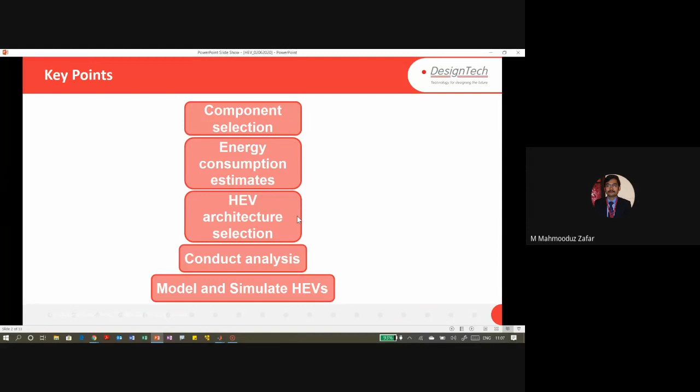So with that, I'm going to start with what are the challenges with HEV design. There are various challenges available in HEV design. I have taken some of these challenges and jotted them down on this slide, so we can see how MATLAB and Simulink can help us overcome these challenges. First is architecture or topology selection. This is the biggest challenge, how we are going to select a particular architecture which we have to design for HEVs. So this is the first challenge.

Second, again, is the selection and sizing of components. Various vehicles require various components, as well as different sizing and specifications. Then there's complexity in modeling plants and controllers. Definitely, when we are going to design our vehicle from scratch, we need to build up different plants for that particular vehicle as well as controllers. How are we going to address such kind of complexities?

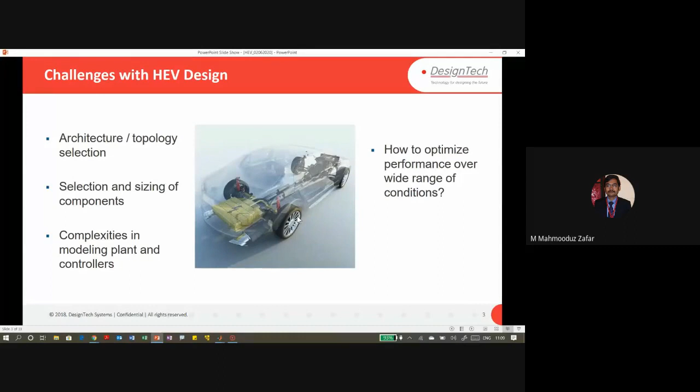How we can optimize performance over different conditions, like various road conditions and environmental conditions, so how we can overcome the performance challenges of these HEVs. And whenever we are building control algorithms for HEVs, whether those algorithms are real-time implementable or not, whether we use them in real-time scenarios or not - these are all challenges. We are going to address some of these challenges in terms of design and simulations, which is what we'll discuss in today's presentation.

For optimization and control real-time algorithms, separate sessions are there, so I will share some links so you can go ahead with those sessions. As I said, in today's session we are going to discuss these kinds of things.

I have taken an example with these challenges which we have right away. First, for HEVs we have parallel or series-parallel architectures. For example, we see a front engine system, then a clutch system, transmission system, different wheel positions, and different components available.

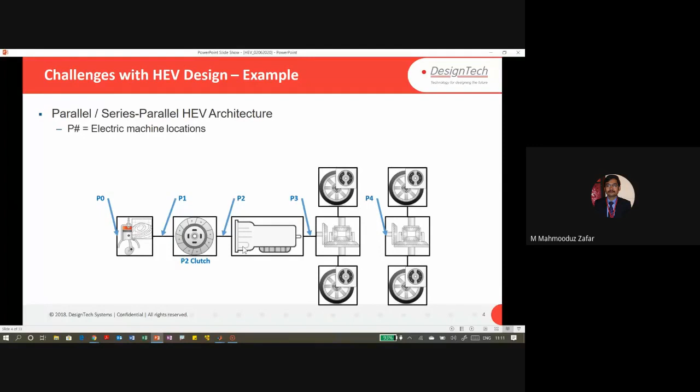We have different locations available for these electric machines. When we say P followed by a number, that means a different location - so first one is P0, then P1. There are various options or sections available which we want to simulate on top of MATLAB and Simulink or any other software. These combinations can be chosen depending on our need - which particular simulation requires a simple P2 combination, or P1-P4, or P1-P3 combinations.

Every combination, or each location, has different pros and cons. How we address these - for example here we have a P2 combination available, with clutch, machines, which is nothing but some gears, as well as transmission and clutching system combined, or generators or motors that we can use along with the whole system. There are various different combinations available which we can use with reference applications provided in MATLAB and Simulink tools.

Another thing is selection and sizing of components. As I said, whenever we need to choose motors, generators, or other machines, we have to select from specific libraries. Or sometimes we need to work on data-driven modeling, where we have to link our components with specific data sets that have certain limitations - it cannot go beyond a particular point. So that kind of linkage is available.

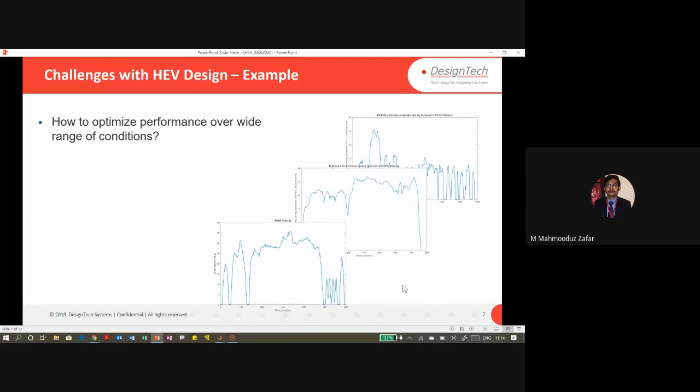We need to reduce energy consumption so that we can intake lesser fuels or lesser energy, so that it can provide maximum performance. Also, drivability requirements are there, such as acceleration time and gradability, and many more options which we can address while designing HEVs. Depending on our need, we can address out specific challenges with this.

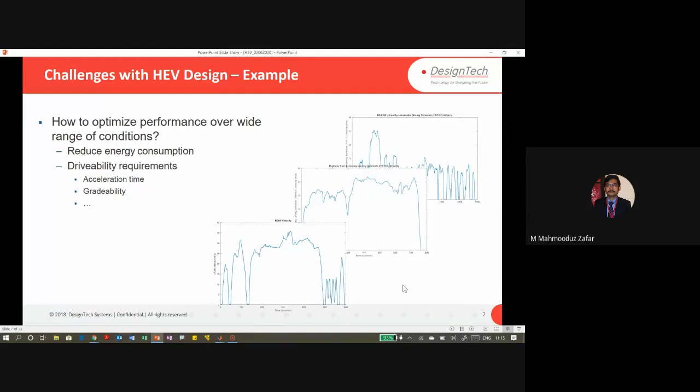So we have options available, we can start defining from a requirement into a modeling environment. Whatever our project need is, whatever our modeling need is, we can directly define in our environment, which is known as Simulink. Then after that, we start designing our system.

That's why we say system level design, where we can evaluate and complete architecture, assess performance, and use it to develop closed loop kind of systems also.

Subsystem design: we can distribute, like in a vehicle or a particular system, there are various sections available. Transmission is a separate section, acceleration is a separate section, electric system is a separate section. We can distribute things like battery management or engine into different subsystems and design a complete system within the Simulink environment.

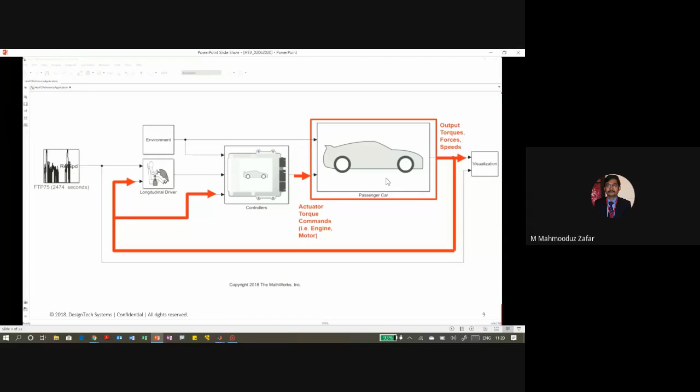Now what we are going to do is run a simulation of such a system and see what kind of outputs we are getting.

So in this model, what we are doing is just executing the model so that it can run. As I said, this model has various components, so it needs to be simulated, and we can get results in this visualization section.

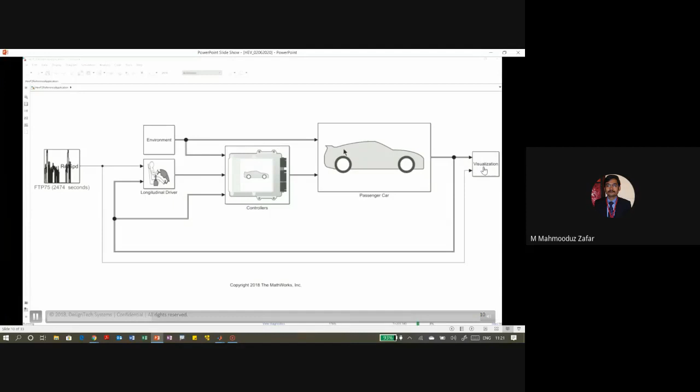In this visualization section, we have different scopes available where we can see performance curves. While simulation, we are able to see various curves where we can identify engine speed, motor speed, velocity, and we can trace targeted and actual velocity. We can see what the battery current would be, battery SOC, or fuel economy. So a complete analysis we can visualize in this place.

If somebody wants a three-dimensional kind of visualization where we see how a vehicle is actually moving, when some obstacle is there, how it behaves, those kinds of options are also available, so we can link up our Simulink models with various other tools which can perform virtual scenarios of the external environment. So we can link up with Simulink 3D Animation, a product which allows us to define a complete virtual environment in a VRML kind of format, and we are able to see how these things are moving.

If somebody wants to make an autonomous kind of system, we have tools available like the Automated Driving System Toolbox, which allows us to perform complete autonomous simulation, and we see that again in virtual scenarios. Options are also available which allow us to link with third-party tools so that we can visualize in those kinds of environments also.

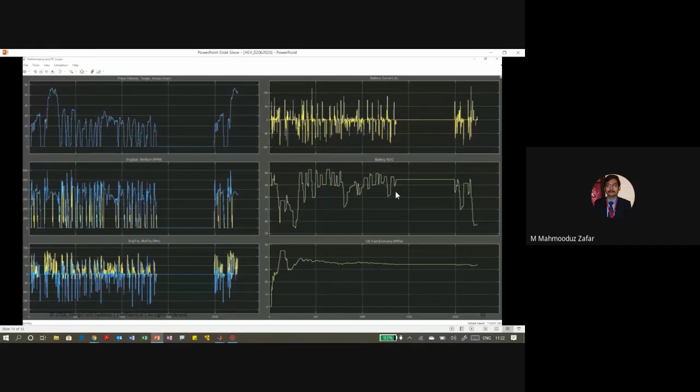So we have seen a few things about how my model looks like. Now the question arises: how are we going to design such kinds of models within the Simulink environment? To design such models within Simulink, we have different component modeling types available. What are these types?

First is the first principle method, data driven method, and behavioral method. Now what are these different methods? We are going to discuss this, and see which methods will be beneficial or used to design a specific system.

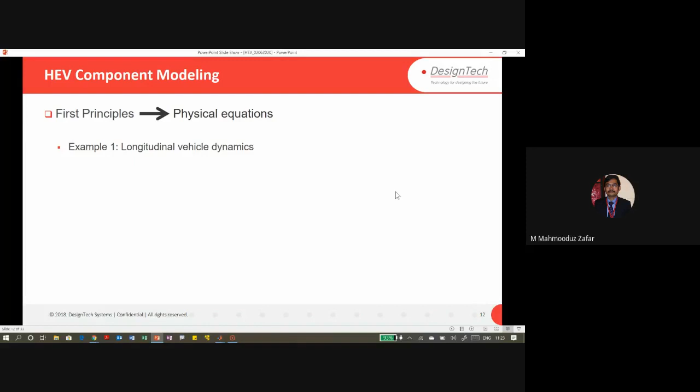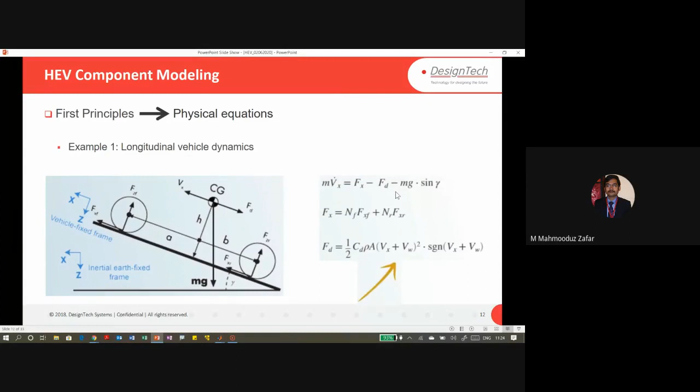When we talk about the first principle method, it is nothing but one or more physical equations available, which we use to design a specific model. For example, I have taken longitudinal vehicle dynamics, where we see a free body of 1 degree of freedom, whose equations will look like this. So where various changes are there, those kinds of equations we can directly design by using the first principle method in MATLAB or Simulink environment.

Another method, as I said, is the data driven method. In this data driven method, we have steady state maps available, and by using those steady state maps... steady state maps we can implement via lookup tables. As I said, we have a set of data available, and with that data we can use lookup tables within Simulink and design those things.

We are defining fuel mass flow in this place along with engine speed and commanded torque, so we are able to get points from within this kind of data set. Or we can use the efficiency curve, where it can be suited with speed and torque within a particular limit that has been defined in this place. We can add dynamics by using transfer functions, which will act as a plant within the Simulink environment, so we can use those transfer functions.

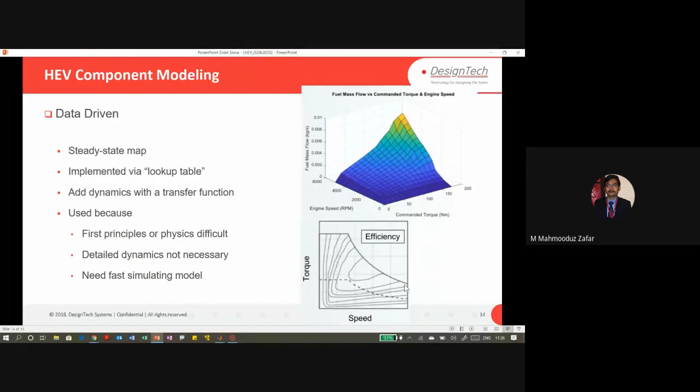As I said, sometimes detailed dynamics is not necessary or required, or sometimes we require a fast simulating model so that we can link it up with hardware-in-the-loop kind of simulations or real-time simulations. So we use such techniques. For this, we have taken an example of an internal combustion engine, where we need to identify the relation between actual torque, commanded torque, or engine speed, or as we saw earlier, fuel mass flow, commanded torque, or engine speed kinds of things.

Or when we have some electric machines available and inverter available, where we need to map with those electrical machines along with those inverter values. Like I said, this efficiency curve is completely linked with torque and speed, and we have certain limitations available, with that limitation it is going to map these inverters and electrical machines so that we can get a proper result.

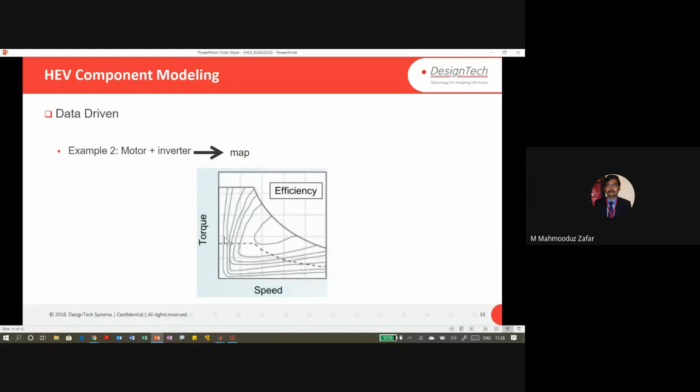So this is another example for data driven method. Now the last thing is behavioral model. What is this behavioral model? We are not modeling actual physics, but our model produces similar dynamic responses like what we have seen in the first principle method.

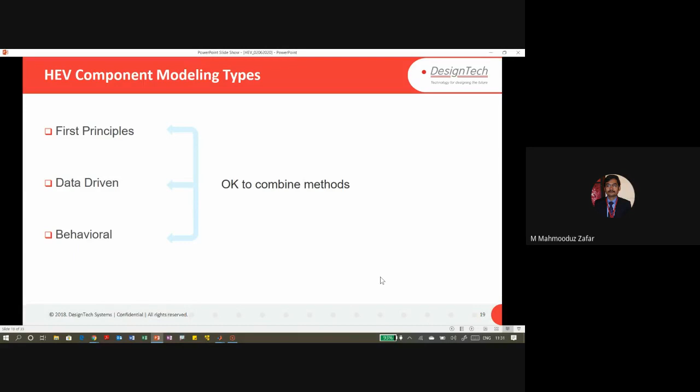Sometimes it happens that we need to combine these methods. Like in first principle method, we need to use some kind of lookup tables so that it can use a data driven kind of modeling, or sometimes we require certain equations and want to use those in behavioral things. So combining those things is okay. We can combine all these three methods or alternative methods, whatever needs to be combined. It is very useful when we are not working on some specific standard models or components, which is not for a particular manufacturer, where data sheets are not available.

In that case, parameterization will come into picture. We have similar kinds of blocks available. With those blocks, we can define what parameters are required. Now how we can define such parameters? For that, parameter estimation comes into picture. We use parameter estimation by lookup tables, and with that we can identify what actual parameter is required for a certain component, so we can use it whenever we are working on non-standard kind of modeling. So it is okay to use all these three methods alongside.

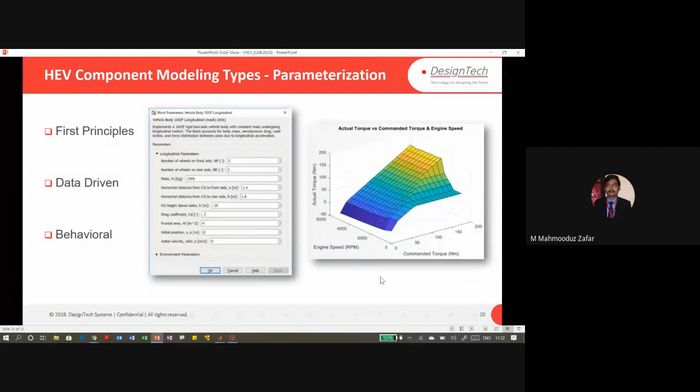What kind of HEV plant modeling tools are available? First is Powertrain Blockset, and another tool is Simscape. These are two environments available on top of Simulink, which allow us to design a complete system. Now we will see what these two environments are and how we can build up a model using the components available in them.

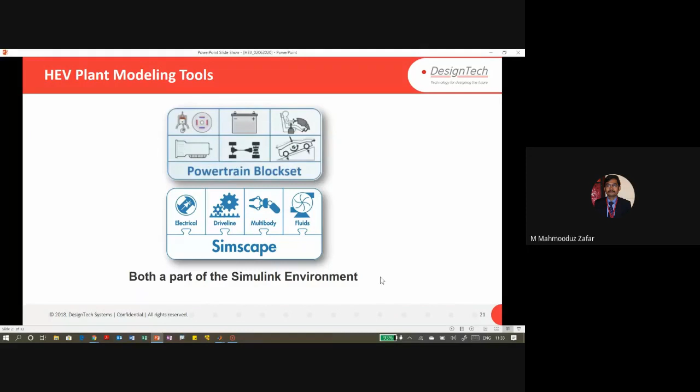I'll first discuss a few of the Powertrain Blockset features, and then we can go ahead switching directly onto the MATLAB environment.

So we have some pre-built reference applications available, where we can get help from conventional vehicles, hybrid electric vehicles, and different engine models. By using those reference applications, we can start working on this.

With that, I'm just switching on the MATLAB environment.

So this is my MATLAB environment. Now I just want to quickly explain what this environment is, for those who are new to MATLAB or have used an earlier version. You can see there are a number of windows available, like the command window, current folder, and workspace, with various tabs in these places. Every window is responsible for a different purpose.

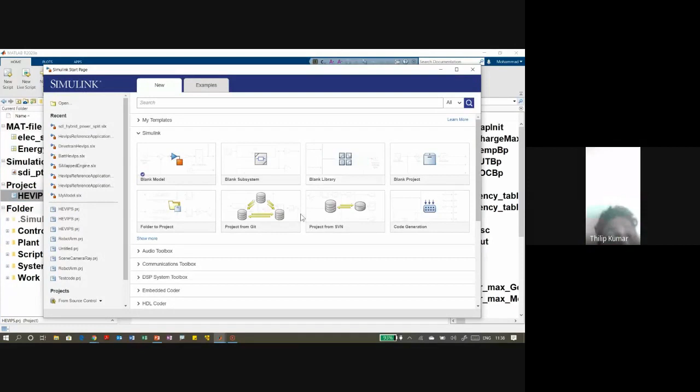In this Simulink start page, we have various options available. We can use Simulink or any of the tools available. Here are ready references—like if I want to work on a library, a project, or a code generation kind of project. Same way, if I'm working on a specific field, like powertrain things, I just need to go into the powertrain library, and I'm able to see what kind of different templates are available here.

Or I can simply go into this example section where I'm able to see those reference examples which are readily available for me. I can use those reference examples to build up my own. Here you are able to see that various options are there, like if I go into Powertrain Blockset, I'm able to see that various reference examples are available.

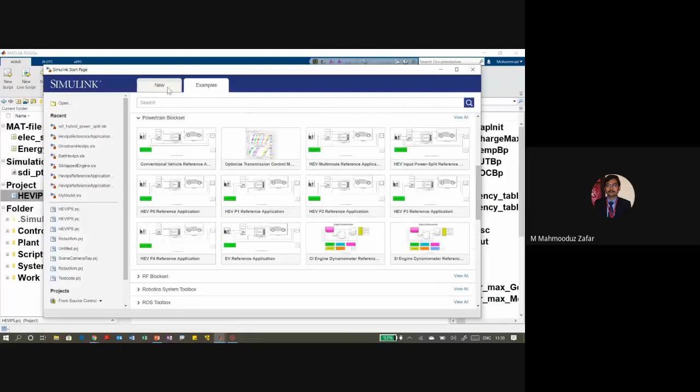Now I'm just quickly moving onto this templates page, and I say that I need to create a new model. So when I say create a new model, it will launch a blank canvas, Simulink canvas for me. Why am I saying a canvas? Because here we are going to design our complete system. So how are we going to design this as a system?

So in this particular canvas, we have certain options available. With these options, we are able to see that it has tabs of simulation, debug, modeling, formats, and apps. So various different options are available.

So here we have general tools available which we can use, like I want to see the Simulink library browser, I want to select a particular signal which can be logged and viewed later on. We need to change start simulation time, simulation mode. We can use debug if we want to debug our model, and different modeling aspects, so we can go and change those.

Same way, apps is there. So when we want to use on top of Simulink some of the apps, like for real-time simulations, or some kind of control algorithm, or to see LTI kind of curves of a system, we can use these apps, and with these apps we are able to find out relevant information.

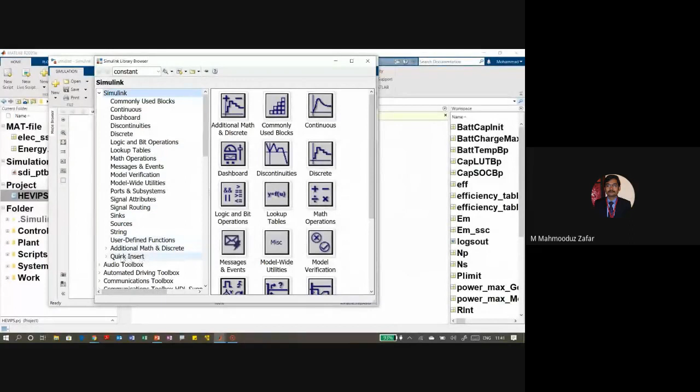In this Simulink, there are various libraries available. Depending on your licenses in your institution, you are able to see various libraries, because if I have a complete set of MATLAB tools, I am able to see all of the blocks which are available. But if you have only a Simulink license, you are able to see only up to this place. Additionally, if you need to use any other tool, you need to buy that as a license.

Now, in this Simulink, we are able to see that different other libraries are available, like continuous library, different dashboards are there. Further other libraries are available, so we can use these blocks depending on our need, on what kind of block is required.

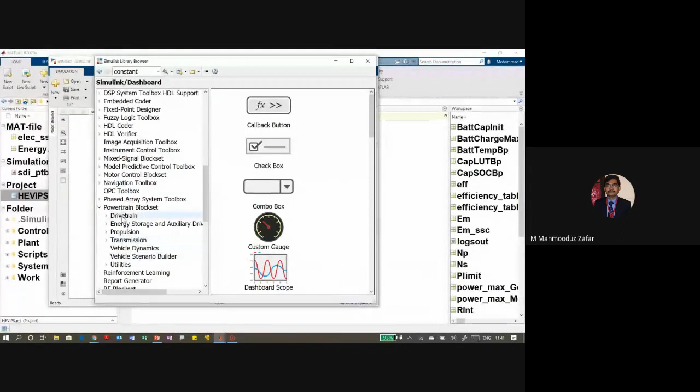Same way, if I go into Powertrain Blockset, we have again different sub libraries available. With these sub libraries, we are able to see different components like couplings, disc clutch, gearbox, planetary gears, which we discussed in the presentation slides. So all these blocks are available.

So what we need to do is just drag and drop these into our model window, or by right clicking in this place and saying add this block to model untitled.

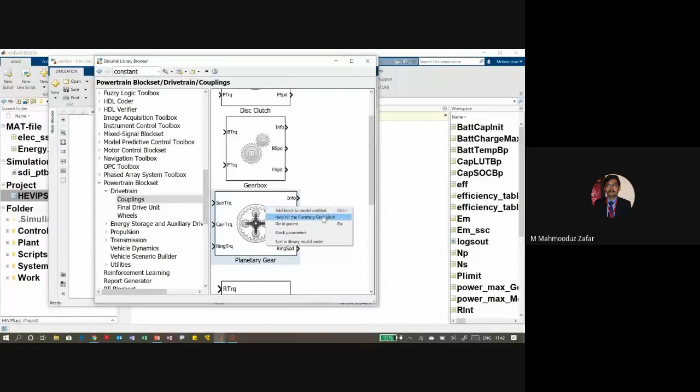If we want to take help on a particular block, it will launch help directly from this place where we are able to see what this block is. A complete description is there, its equations are there, as well as the different options available, what different ports are there. So a complete description about that block is available in the documentation, and wherever it has been used, an example has been given so that we can see it in working or running condition.

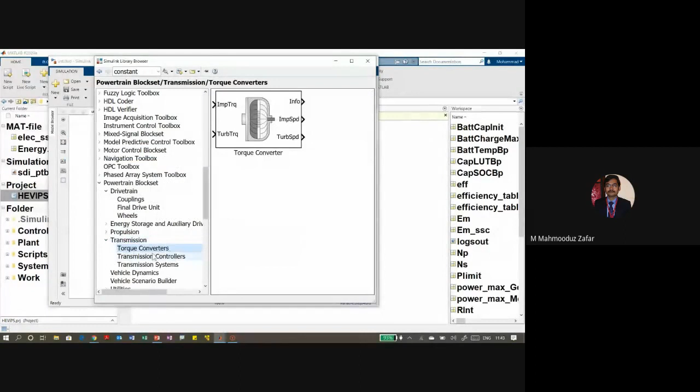Same way, if I go into transmission, we are able to see what different transmission blocks are available, like these controllers are available.

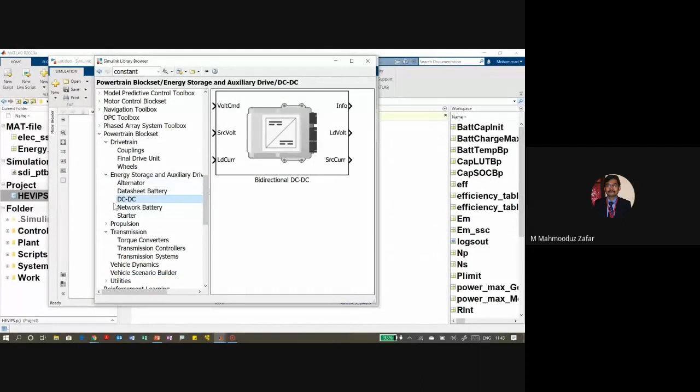If we go into vehicle dynamics, we are able to see what different vehicle dynamics blocks are available in this place. Vehicle scenario builders are there, like drive cycle sources, longitudinal driver blocks. For energy and storage, like alternator or a DC to DC converter is required. For propulsion, different engine components are there, like a core engine. So we are able to see that certain different blocks are available, which we can use directly into our model.

So as I said, I can just drag and drop, or right click on this. Another option is that I need to use this Mapped CI engine in my canvas. These are new features of the Simulink environment where we just click somewhere in my Simulink canvas and start typing what my requirement is, like Mapped CI. It will list out all the blocks with that name, and if I click on that, it will fetch that particular block for me in this place. Now this block is available.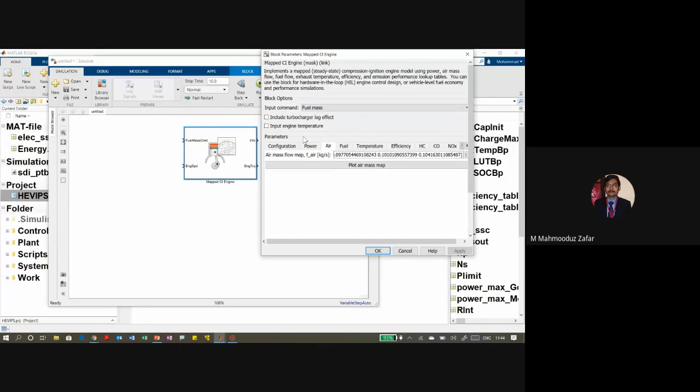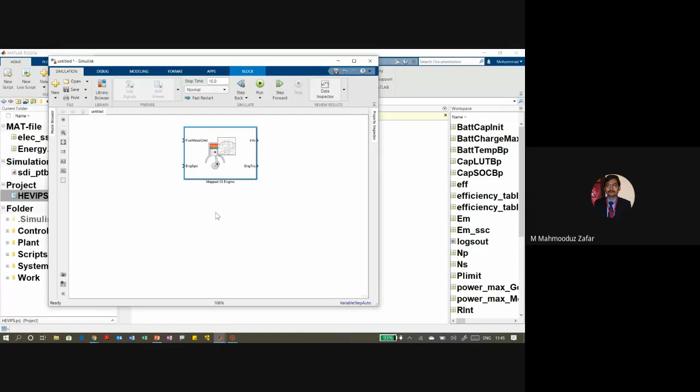I can just double click on this and it will open a property editor for me, where I can choose various properties and change things like what could be the input command - fuel mass or torque, what will be the configuration, power. Various options are available here. We just need to set up those things so it can be used according to my model's need. So by this way we can pull out some blocks and build up a model on top of Simulink.

For time's sake, I have already designed a model within this, so I just want to open that model. This is the model we have seen in that video. So that same model we have opened up, and we have various blocks available.

If I go in this drive cycle sources, we are able to see what kind of sources we are using, like drive cycle source. Various sources are there, so we can choose from some files or some pre-built kind of things. If we want to define some kind of fault tracking, we can use that fault tracking option also. There are various options available. If we want to install some additional drive cycles, that option is also available in this place.

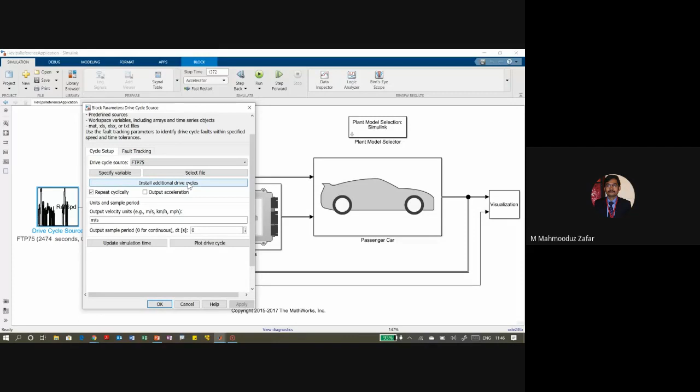Same way we can use these controllers. If I go in this controller, it has these kinds of blocks available. Further on, it will show what kind of different models are there, like engine control model with ECM and HCM, hybrid control module and engine control module kind of things. So we can design in such a manner that we can use various options.

Same way, when I go in passenger car, there are various options available, like electrical plant, drivetrain system, and engine system. So when we have a bigger system, we define it in different subsystems.

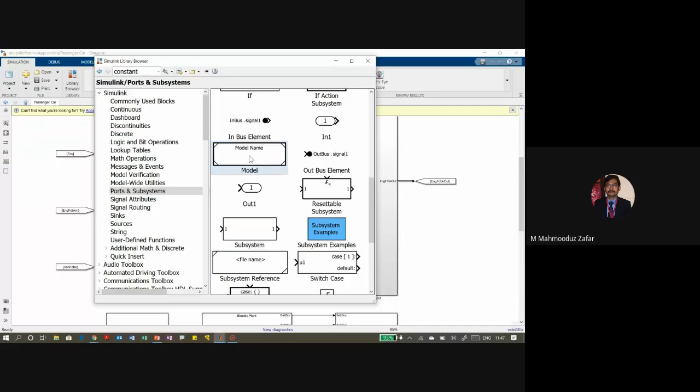For that, again, if I go in this library browser, under ports and subsystems, we have particular subsystem blocks available. Here you're able to see we have a particular block named subsystem or a model reference block. These blocks we can use to design a specific portion of a complete model.

Now if I go further into engine, we are able to see there are different variants of engine available, like SI engine, SI mapped engine, CI engine, CI mapped engine. You are able to see this particular one is highlighted right away, meaning we are using these options. So we are free to choose out those kinds of models which are available in this place.

Same way if I go into electrical plant, there are two options there: electrical plant with powertrain, and with SimScape. I will discuss this later on. First, we will see what kind of different blocks are available.

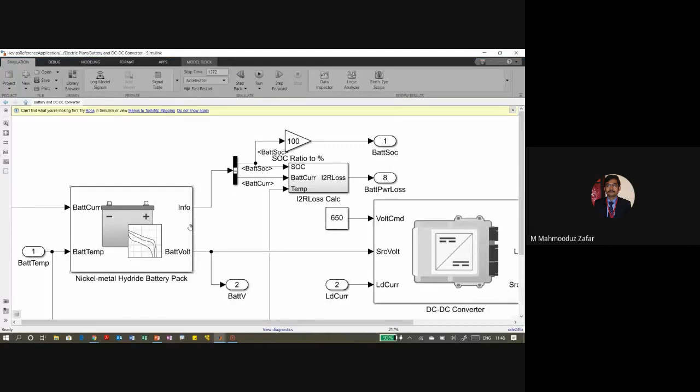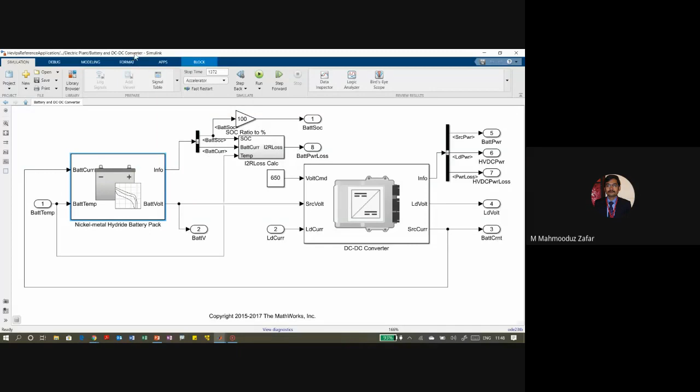Here you are able to see such kind of block - this is a reference model, meaning it is not designed here, it is a separate model. So when I launch it, it will open that same model which has been linked along with this one. You see this is a model where we have designed a battery, used a battery pack, used a controller, converter, DC to DC converter, and we are using it. So you see this is a separate model stored in a different location. We can use that also, we can use it as a subsystem. So various options are available.

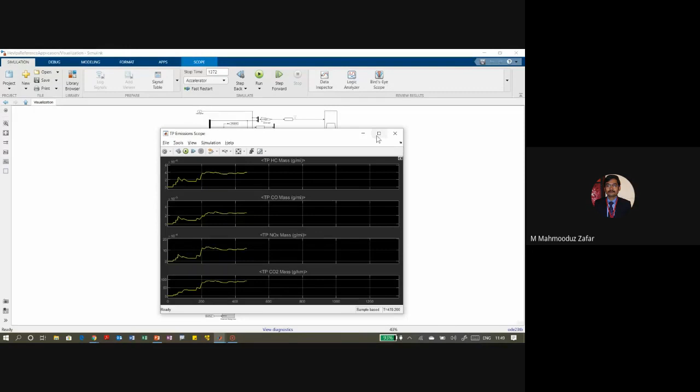Okay, so now when we go into visualization, what we are doing is passing all those outputs into these scopes where we can visualize those things. We can use a normal scope, or we can use some signal analyzer kind of scope, like spectrum, where we are able to see those things and trace out various results.

So when we are done with our designing, we have to see what kind of options are required for setting simulation. You see here that different options are available: normal, accelerator, rapid accelerator kind of options.

So when I say normal mode, that means I'm running my simulation with these blocks only, whatever blocks I have used. When I choose accelerator or rapid accelerator, that means I'm converting, first breaking my blocks into C code, and then running it as C code, because we know a C code runs faster than anything. These options are directly available.

We just need to go and select from the drop down menu what kind of options are there. Now what is the need of that? Because I'm using so many components in this place, if I run with normal mode simulation, it will take a longer time to simulate. Like still I'm running for 1372 kind of seconds, but it takes longer time to run that simulation.

To overcome that, we just selected our accelerator mode. What it will do is find out whatever reference applications are in the whole model, because I have shown you I have so many subsystems available. With that subsystem, how am I going to run those things? So we just say accelerator mode, and we say run option right away.

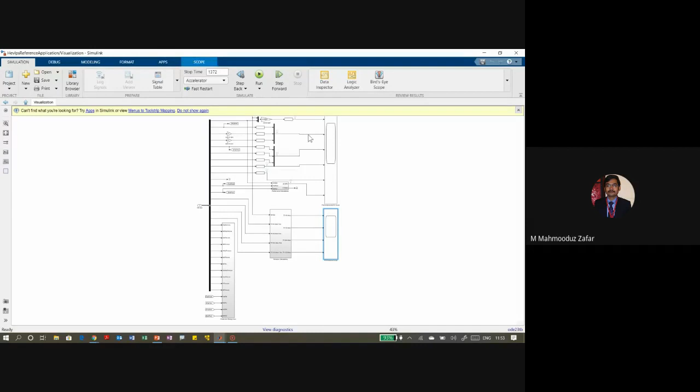But we have further options, because right now it is just visualizing, but what if I need some comparison within these, or need to inspect thoroughly those signals which have been generated. So we have options available, like if we go in this place, you're able to see these kind of options, a wireless kind of option, which means it is going to log this signal.

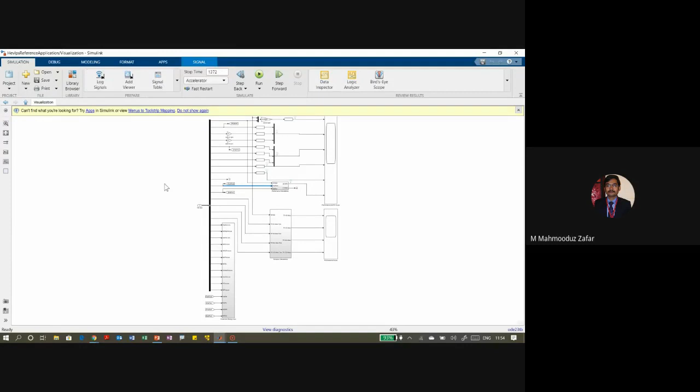So if I right click on any of these signals, like right now I'm just right clicking on this place, we have the option log selected signals, or we can select out a specific signal, and here an option is there, log signals. When we do this, it will log that signal into MATLAB memory, and with these options, like here that bird eye scope is not required, but data inspector or logic analyzer will allow us to inspect that data thoroughly. So if I launch the data inspector, it will open a new window for me.

In that window, we are able to see the run I have done right away. So what I do, I just select out a battery current. I have run a simulation this morning also, so same way I select out a battery current in this place. So whatever changes we have done, we can compare in this place, what are the changes if we do some parameter change. We can thoroughly compare those things here.

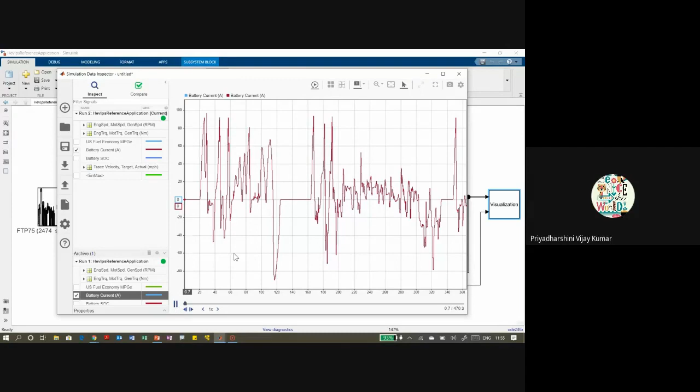As I said, when we are running some kind of simulation, it takes longer time. But when we have such a result, we have an option so we can simply click on play, so we are able to see at what point what kind of simulations are there. Now you see, I'm running in this place only, my model is still at stopped condition. So we can see what different points are there, at what point what kind of outputs are coming. We are able to see that as soon as it changes, it starts showing those changes, at what time what kind of changes are there.

So this will allow us to compare different results so that we can identify what kind of parameter is suitable for my model. Let's say I have two different parameters and I'm getting confused which parameter is used in my model. So I can run with both of the parameters, compare their results, and identify what parameter is required from those, or maybe that the value in between, or some extrapolation or interpolation is required for that. So we can use those things.

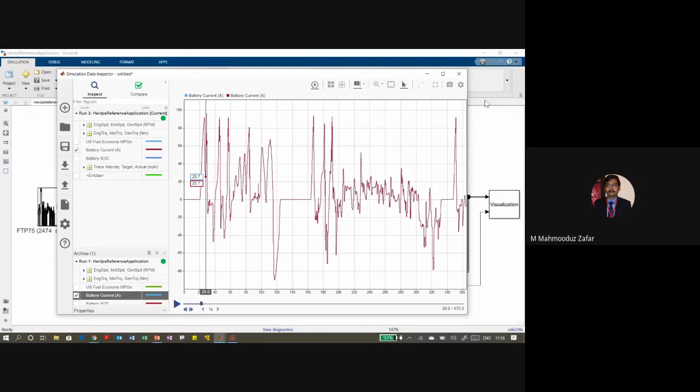Same way, this logic analyzer is there, which will allow us to see different logics at a particular second, what values are available for specifics. So we are comparing all of those points, and wherever different logics are there, it will show in digitized manner to us.

Okay, so I'm just moving on to the presentation. So what we have seen is...

Powertrain library. So what are the different benefits of Powertrain Blockset? It will accelerate our system development process because we have ready blocks available for specific applications. We can use those blocks to build up a complete model, like from these libraries where we see different documented blocks. We can use components and subsystem models. So all those things are there.

As well as that, it has pre-built reference applications, so we can use those pre-built reference applications and change them as per my data sheets, parameters, or requirement. It will also allow us to run for HIL development. So if some controller, like we are seeing this thing, if I want to run this controller for HIL, we can use it for HIL purposes also.

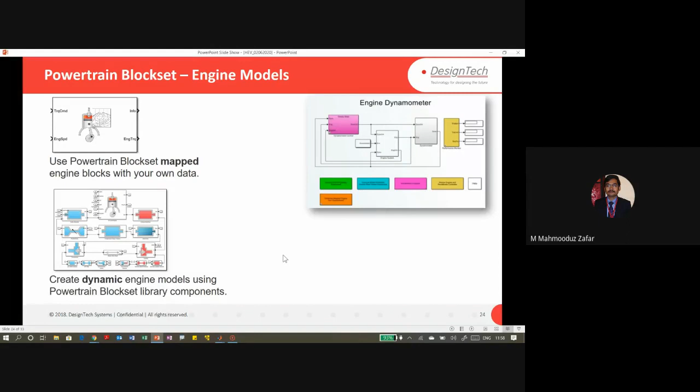Okay, so we have seen that different engine models are there. With those engine models, what we could do is use Powertrain Blockset to map with our own data sets, like I've shown the parameter block box where we can set up our own parameters, or we can create some kind of dynamic engine models by using Powertrain Blockset library components.

Or we have an option so that we can connect any block from some CAE kind of files or CAE kind of models, like this GT Power kind of model, which we can connect directly with this system. So those options are also available. We have a full-fledged option for engine design available, which we can use on top of Powertrain Blockset.

Now we have seen one thing, which is Powertrain Blockset. Another one is Simscape. Now what features does it have? Simscape will allow a platform for physical modeling. Powertrain is just specifically for automotive, but Simscape can be used for various purposes. With this also, we can design similar kind of models, so that we can get results and compare those things.

Like here you are able to see that when we talk about Simscape, we have various different libraries available, as well as custom equation options. So on top of Simscape, we have various other libraries available. Simscape Driveline will allow us to take blocks as gears, lead screws, clutches, tires, engines. Various blocks are available in this library.

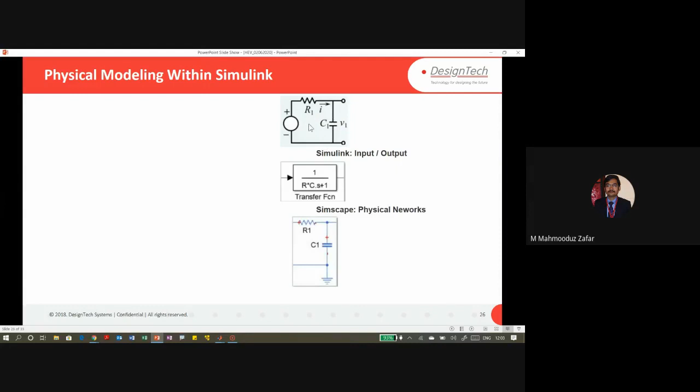As well as that, it's easy - when we have this kind of problem statement available, we just use such blocks. But what if it gets complex, with more stages of RLCs? Then that particular transfer function alone will not help us; in this case, we just need to add a couple of more blocks. So it is up to us what we need.

I prefer that whenever I need to design some kind of physical system, I prefer Simscape, as it has various different libraries available, so we use such libraries to design certain models.

We know that MATLAB and Simulink is a tool which performs mathematical modeling simulations, which means it uses a certain set of ordinary differential equation solvers to simulate the complete problem. But certain problems require a specialized set of solvers.

Like the Euler method, for instance. So when we want to use certain options, it is provided within Simscape so that we can use those methods to simulate certain problems.

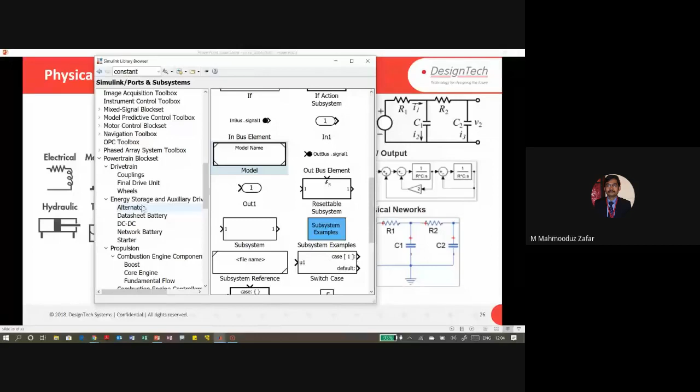Now I'm just switching back to this same Simulink library, going to the Simscape library. When I select the Simscape library, it has certain different sub-library options available: Driveline, Electrical, Fluids, Multibody, and Foundation and Utilities. So Simscape is a separate block, and these four are separate blocks, and Simscape itself consists of a foundation library and a utilities library.

When we go into the foundation library, we can find further sub-libraries. So if we have only Simscape, we can still work on electrical things, gas problems, hydraulic problems, moist air, physical signals, thermal liquid - all these things are there which we can design along with this.

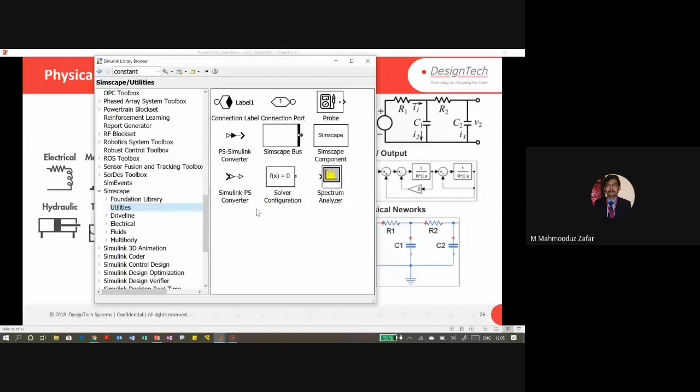Same way, when we talk about utilities - it has utilities because in the end we are taking inputs from the Simulink environment and providing output also in the Simulink environment, since most of the output and input blocks are available in Simulink. So for that, we have these kinds of converters or blocks available, like interconnectivity.

Interconnectivity with, let's say, suppose I'm working on a DC motor. In a DC motor, electrical and mechanical components are both there, and if I want to design such things, we can use those ports to connect out two different domains. Now what I'm doing is I'm just taking any electrical element block, a diode.

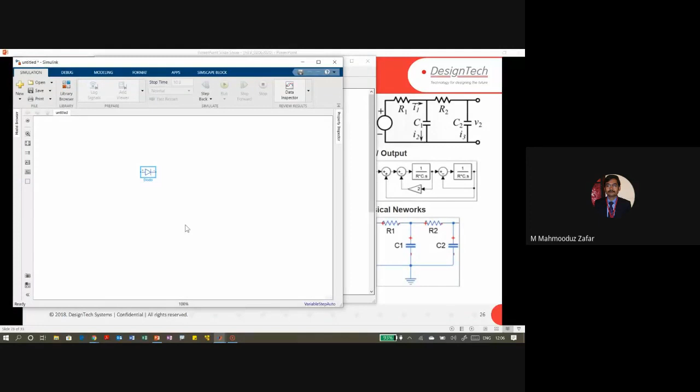I just need to open a new model. In this new model, I just use this diode block. Now with this diode block, when I open its properties, it shows that I have various parameter options, various variable options, which we can choose from these places.

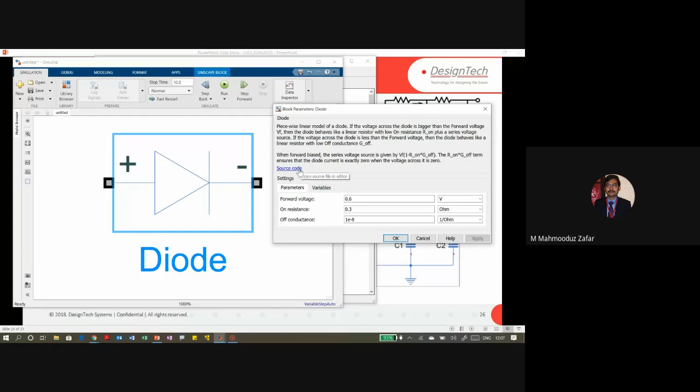But what if I need to design my own kind of diode, or I need to modify this diode depending on my data sheets? What I could do is just click on this source code. This Simscape block will provide this kind of source code, which will allow me to change their equations.

Now what we have to do is design a physical component. As I discussed earlier, if we have certain equations available for an electrochemical kind of component, we can design such things also, a specialized resistor. So we can design those things also. Directly we need to write down what parameters are there, what different equation sets are there, and with this we can design a complete component.

Every component available in the Simscape library has certain options available. Like if I go into an op-amp, you see I have a source code option. If I go into any of these hydraulic components, you see I have a source code option. This option is only available for these Simscape blocks available up to this place. So we are free to design our own components or change these components.

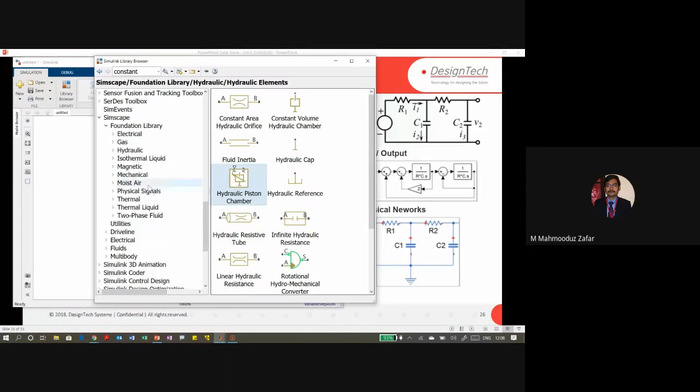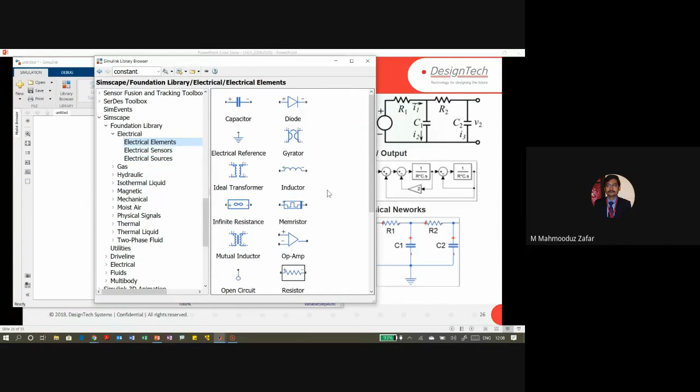But as I said, these libraries have certain limited components available. With these components we can design some basic level stuff. With that basic level stuff, definitely we can design, because all the bigger components are going to use these basic components. But when I need specific things, like if I'm going to design a vehicle system, I'm not going to use all of those things to design a certain thing. What I need is specific blocks.

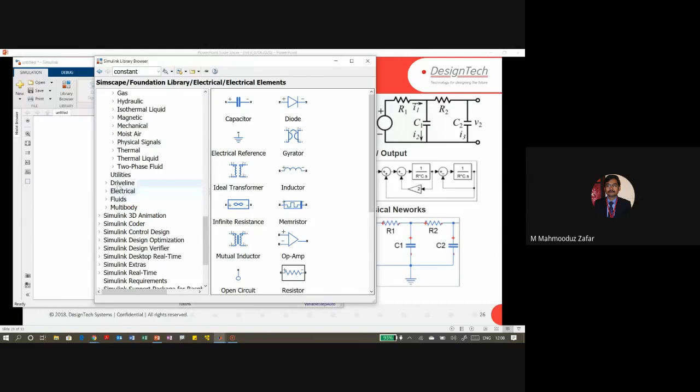That's why Simscape Driveline, Simscape Electrical, Simscape Fluids, or Multibody come into picture. Like in this place, if I go into engines, you see I have a generic engine, a position engine, and piston kind of blocks available. I have different clutch libraries available where different clutch options are available.

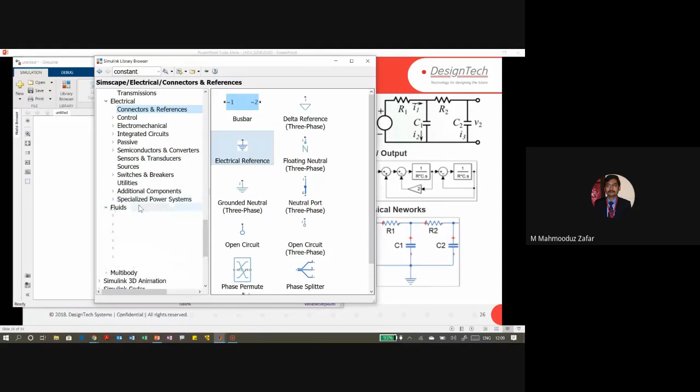Now you see as soon as I select a specific library, like I've selected right now a driveline thing, it shows green color blocks. If I go and choose an electrical library, it has a blue color component. So there's color coding specifically when we're using a specific thing, like you're able to see when I selected these clutches, a different kind of connectivity is required. That means I need to connect some Simulink block in this place. So your blocks are readily available, which we can use to design a specific model.

Same way, if I go back again on that Simulink start page, here also in Simscape similar kind of options are available, as well as when I go into reference examples, reference examples are also available for specific Simscape things.

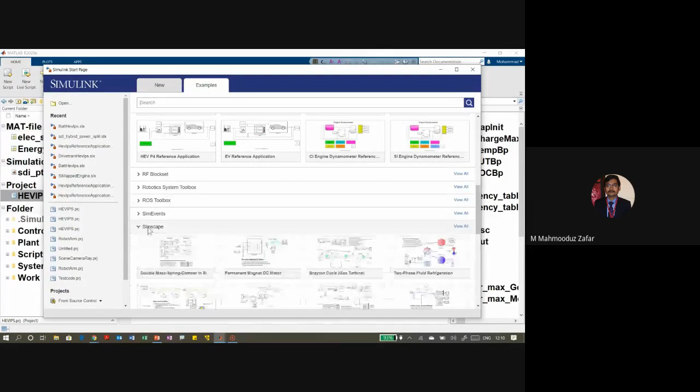Now I'm just quickly opening a model of a hybrid power split model on Simscape, just to show, and then I will show one more example to you. So this is a model of a vehicle simulation on top of Simulink.

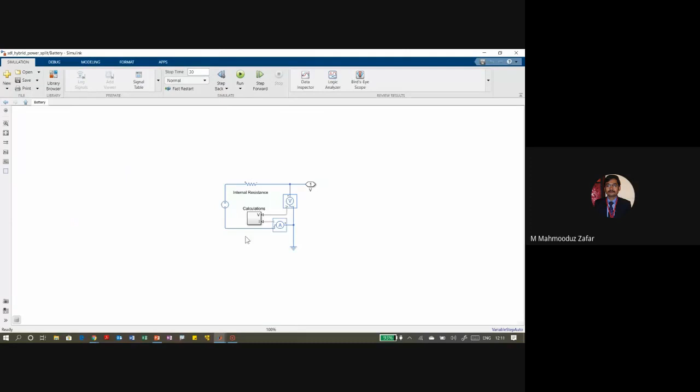Over there you see this is a battery block, where battery modeling has been done by using Simscape Electrical. Different calculations have been seen in this place, what different calculations are there. Same way, when I talk about a DC converter, this has been designed by using Simscape electrical components.

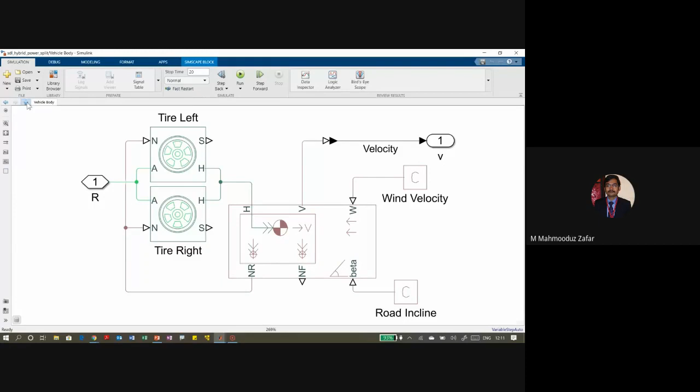Here a power split is there, which has been used from driveline. Engine block has been used. A vehicle body is there, which has been defined with tires, different blocks of the body. And finally, what we are getting is speeds in these places.

Okay, so when I run this simulation, I get some results in this place. So it's doing its simulation thing. Now you are able to see that this FX option is there.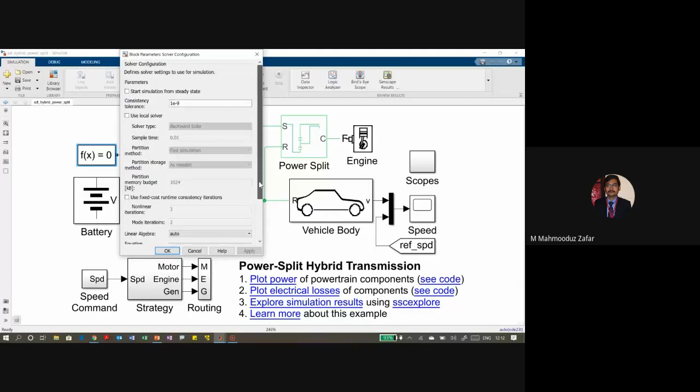As I earlier stated, because I'm using two sets of blocks, Simulink blocks as well as Simscape blocks, this Simscape block will allow us to use various options. Like I need to define specific tolerances, specific solvers so that it can be easily used, what will the delay be, what will the filtering time constant be. So all those options we can directly assign from this one. A set of configuration is available which will allow us to run the simulation of physical modeling things.

Okay, now if I open that block, I get similar kind of results with this. You see what command we have given and how the vehicle body is simulating. So it is almost similar.

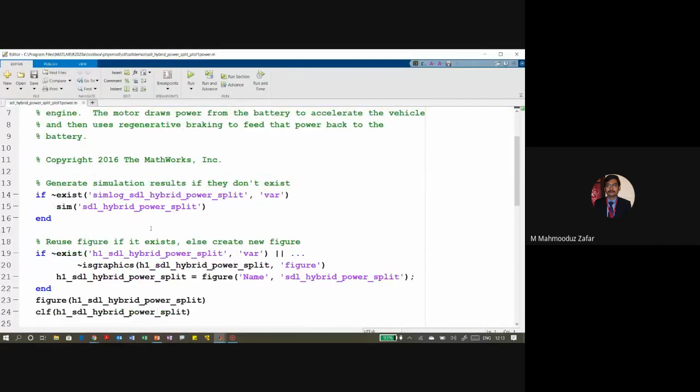Now these Simulink models, whether we talk about powertrain, Simscape, or any Simulink model, this will allow linking with MATLAB, so that if I want to work on some other MATLAB module to use those things, we can. Like here, what we are doing is plotting in MATLAB some of the results we are getting in this place right away. So what we are doing is linking some of the MATLAB code with this model, so that we are able to create some kind of plot. So integration of MATLAB and Simulink is always possible within this.

As well as that, Simscape will provide some option to explore various results. Like I have the Simscape Explorer option available. With that Simscape Explorer option, we are able to see results of various blocks at each and every step.

So why I'm insisting on verifying and visualizing results is because if we get a wrong result at a particular step, our complete model will be ruined. So we need to check step results at each and every step, so that we can get a better model which can be simulated easily.

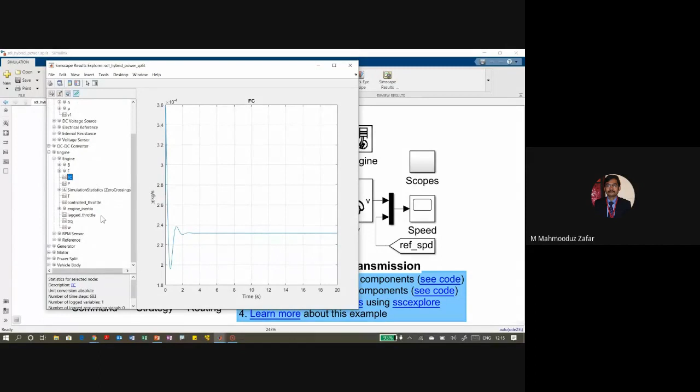Like here, if I go and see the battery current sensor, if I select this one, I'm able to see what is the current within this. Or if I need to see what the engine values are, it shows those things. So in this Simscape Explorer, I can see all of the blocks, all of the outputs in this place, because it is difficult to put up multiple scopes in these places and identify those things.

So whenever you want to run and see the results of various blocks, you are free to use the SSC Explorer also. SSC Explorer is available within this app section. You just need to go in this place and choose the Simscape Explorer.

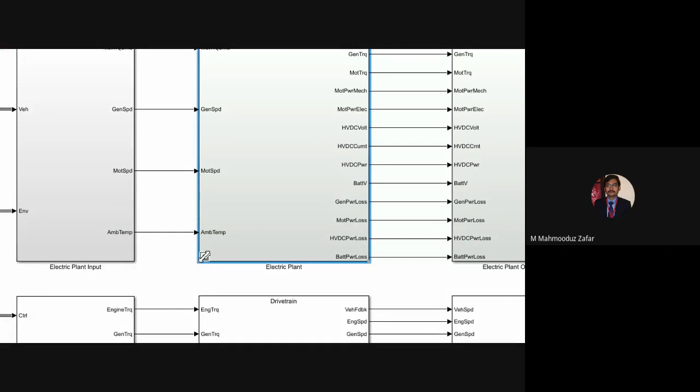Now I'm coming back to this example. So I have shown you here when we run that thing, talking about this electrical plant. Here you are able to see that some options are given, meaning we are using certain blocks from this, and certain blocks are not used.

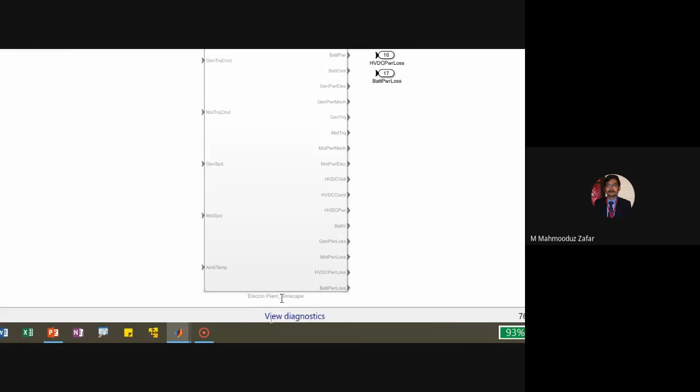So when I go in this place, you see that the electrical plant is there, and one more block is there which is grayed out, which says electric plant Simscape. So what I need to see is what is inside of this. When I go further in this place, I have a motor block. In this motor block, we have a motor map motor and a dynamic motor. So all these blocks have been used from the powertrain system.

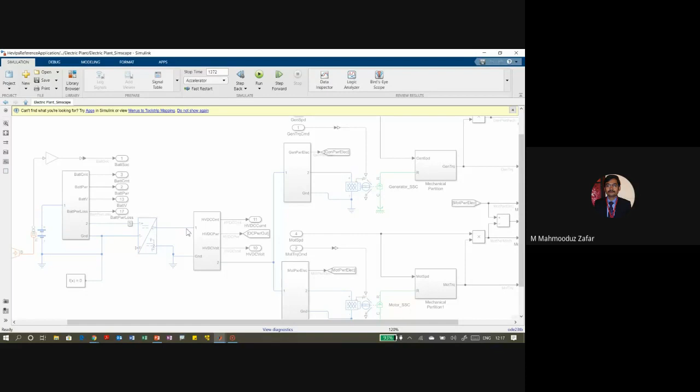But when we go and see this system, this system is a Simscape system. You see that in this system we have certain designs available. I have shown you in that Simscape also that when we are using some Simscape blocks, we have some colored kind of blocks available, as well as their connections right there. This is from Simscape Electrical, this is from Simscape Driveline kind of blocks.

If I go further into the subsystem, we are able to see various blocks are there. So we have designed similar blocks for the model with Simscape as well as powertrain. So what I'm doing is clicking on this place and selecting a Simscape block and applying it. Now when I go in this place again in the same electrical plant, I see that the electrical plant from powertrain has been grayed out. Now this has been selected right away.

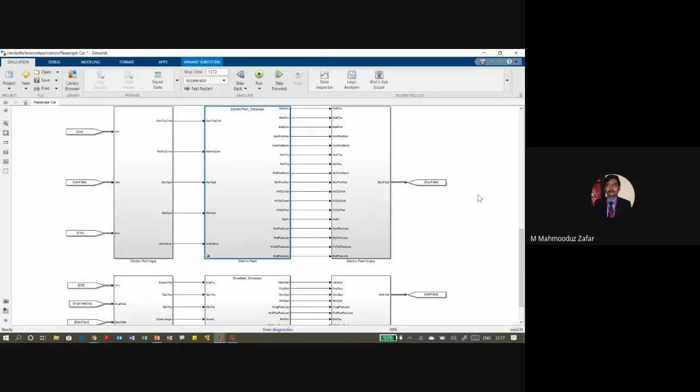So we have two options available. When we want to specifically work on vehicle modeling, maybe we can use only the powertrain block set. Or when we want to work on multi-domain modeling, then we can use Simscape also.

Now, if I run that as a simulation, I get similar results. What I did, I just selected Simscape instead, and I'm running that simulation so we can see what kind of results come. It will do a similar thing, updating the block parameters, but using Simscape blocks instead of powertrain blocks. So whatever reference models of Simscape are there, you need to collect all those reference models and simulate accordingly.

So why am I trying to show this? Because there's often confusion about when to use powertrain and when to use Simscape modeling. You're free to use both, but when you specifically want to work on automotive design, use powertrain. When you want to work on multi-domain modeling involving various domains, you can use Simscape as a model.

So what I'm doing right now is using parallel simulation. I've opened my parallel pool here. Since I have a bigger model, if I run it with just my system's CPU, it will take a longer time. So I opened more MATLAB instances in the background of my system, and I'm trying to load my models onto those instances so I can get faster simulation results. It's trying to load those models into the workers, and once done, it will run the simulation and we'll see the results.

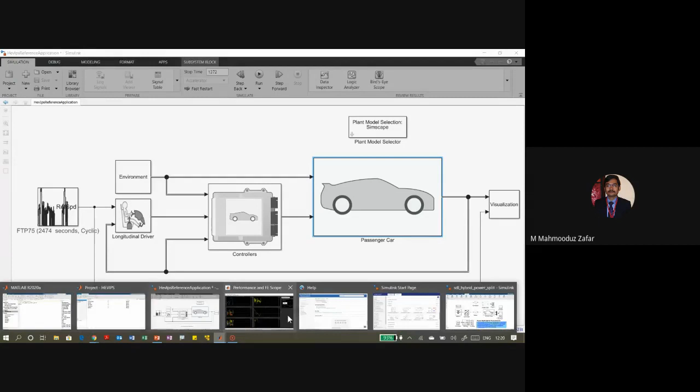While it's loading, let me complete this presentation. So, different Simscape benefits: as I said, multi-domain modeling options are available. Different domains can be included, such as electrical, mechanical, driveline, fluids, thermal, and gas, if required. So all these things we can include. Efficient model building is possible because of certain color codings available for different domains, and extensive documentation and example help is available.

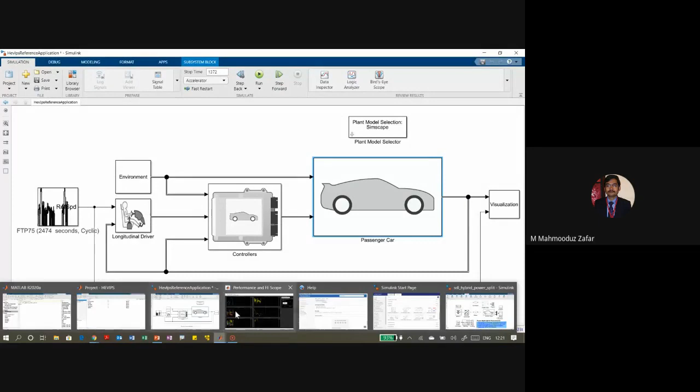What happened? I think I made some changes here, that's why it's showing me that I have to redo those changes and run the simulation again. But no problem, I have recorded that simulation for you, and we will see it right away.

So these are some Simscape benefits. But as I said, these two product lines allow us to work in collaboration also. So these are certain things regarding powertrain blocks as well as Simscape blocks. Simscape provides a flexible architecture, and Powertrain provides pre-built kinds of applications. So if we use them together, like when we talk about Powertrain block set we have certain blocks available, and with Simscape, say we need to design a specific kind of battery for a vehicle, we use Simscape to design that battery and use it along with Powertrain block sets.

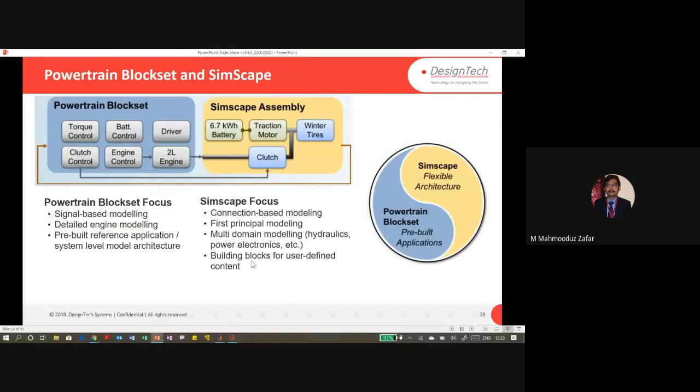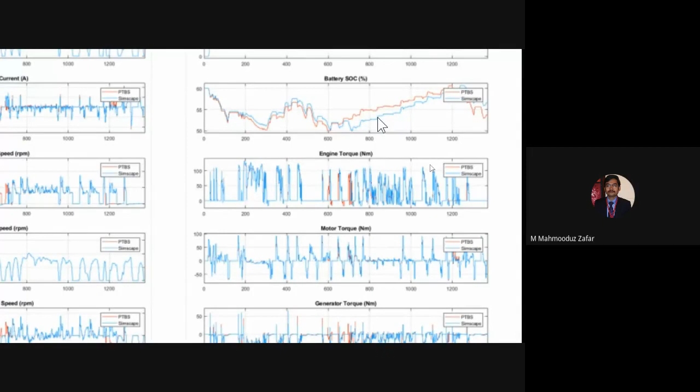So we have simulated most of the things, but here we are able to see that in battery SOC, it's quite different. Powertrain block set has a different kind of result and Simscape has a different kind of result, because the model fidelity of a battery in Simscape and powertrain block set is totally different. So that's why there are some discrepancies.

In Simscape we are using physical equations in the backend. Here we are using a standard set of values which has been defined in that block, or we can say some kind of data-driven things has been defined in those places, and with that it is taking some values for us.

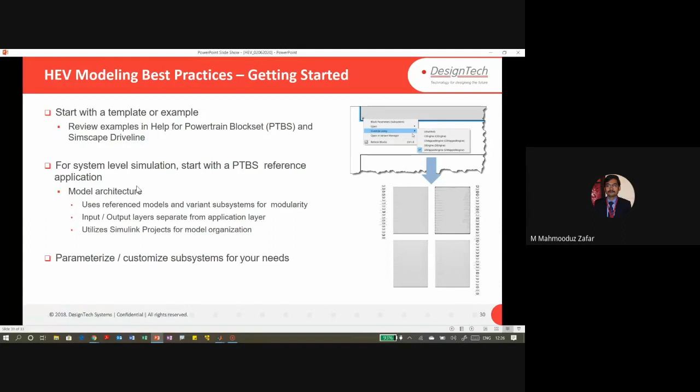To start using this, as I initially said, I assume you already use the Simulink or MATLAB environment, which is why this specific session on HEV is here. But if you want to work on MATLAB and Simulink, or want to learn how to, and you're new, you have some options. If you're already a user, you definitely have MATLAB software available along with you in your institution, so you can start using that.

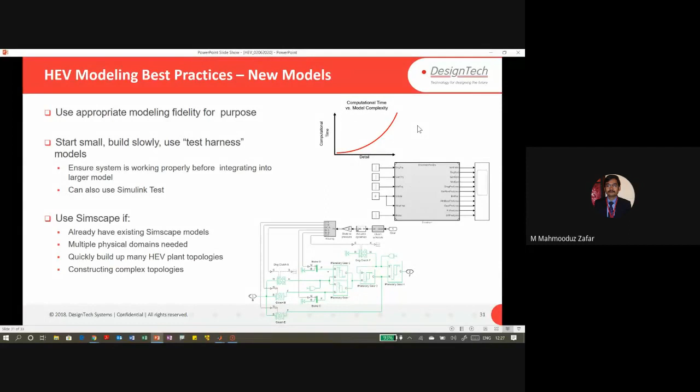Or to learn these things, there are options available as on-ramp courses, which are free for everyone. You just need to go to matlabacademy.mathworks.com, where hands-on sessions are available, each course taking about 3 hours, like MATLAB and Simulink. For Simulink, you require MATLAB software installed on your system; if you don't have it, you can get a trial license from that place. Some courses work in the browser, others work in your MATLAB environment. It has free access to a 3-hour course which allows you to do hands-on work with video sessions, and at the end you get a completion certificate.

So I encourage that you can go and use these on-ramp courses so that you are able to get acquainted with MATLAB and Simulink, say programming and modeling things, and then start using further high-end tools with this. So this is it from my side.